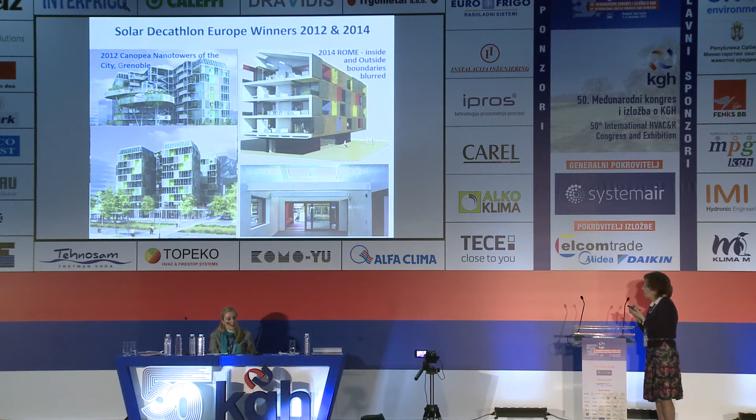So different possibilities in glazing, in opaque surfaces of the envelope, roof and so on. So building integrated PV exactly is replacing one layer within the structure of the building envelope. The Solar Decathlon happening in the US, Europe, and next year there will be the first in the Middle East, did show that it is possible to obtain results which are really remarkable.

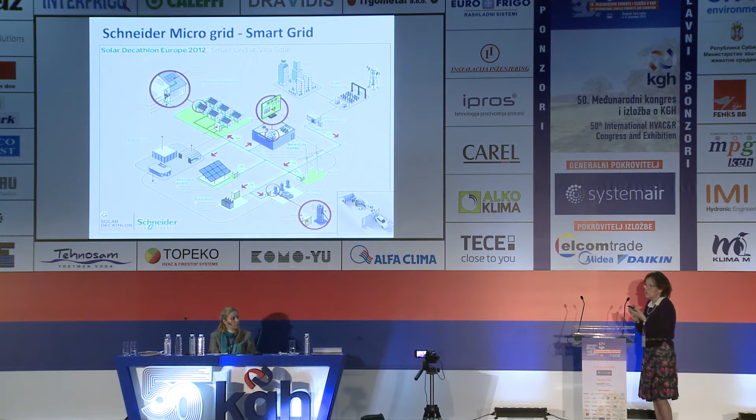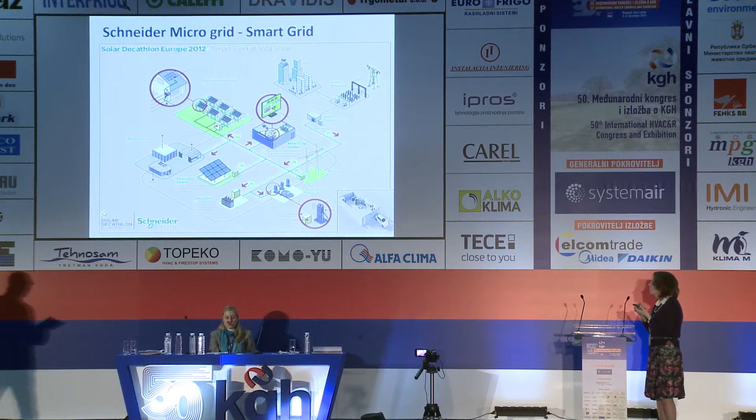Here we see the Schneider microgrid. So all houses very normal, not with very special PV. I mean, not very innovative, but just on the level of current technology, was enough to get houses which were producing 2 to 4 times more electricity than they were using and sending it to the grid. This was in 2014 in Versailles Park, even during days which were not really too rich in sun. So implementation, different types of implementation of building photovoltaic.

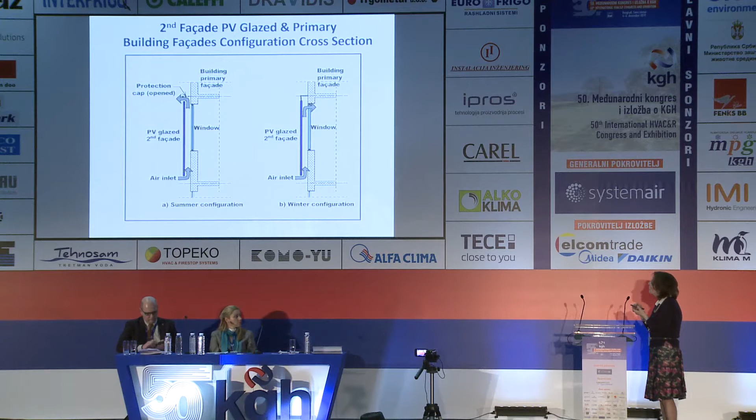So you will see here 2 types of implementation: summer configuration, when this air is used flowing behind the PV glazing, just to reduce cooling loads resulting from solar radiation. Winter configuration can be in the other direction; we can use this flow of air to preheat ventilation air.

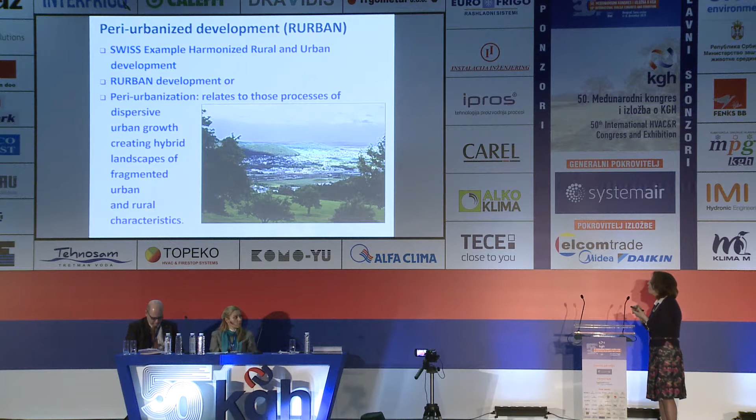The problem naturally with the implementation of building integrated PV: it is no problem in rural areas, when we have no shading from different houses in between, but in dense urban centers, it is not so easy. So, an example of socioeconomic status, and the way Rurban as a system was developed in Switzerland, is a model for all.

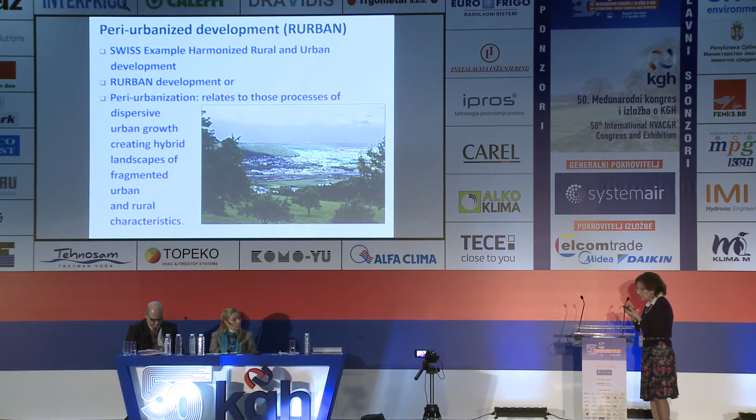So, small cities surrounded with agricultural land and people doing food production, and they are perfect locations for installing building integrated PV. And also there is a rule in Switzerland that only on the roof and only on buildings can photovoltaic or any other solar be used. So not on green surfaces. So big solar power plants are simply not permitted in Switzerland, and that's also very important to be aware of. Wind is different, so wind can be, although there are also some not well-known bio effects.

What is very important, and that is the main target of my presentation and speech, is how we can get cost-effective implementation of solar energy. At first, I say today electrical energy, because electricity is definitely needed for all aspects of life at the standard we need. It provides for people in cities, but also people in rural areas. It means for all Rurban people.

So it is necessary at first to implement in all kinds of design detailed analysis of loads, so dynamic analysis of building behavior, thermal energy, so building performance simulation. Designing any kind of system in buildings today just using summer or winter design temperature is simply not enough anymore. Absolutely, 8,760 hours are necessary to do the analysis, sometimes even for a shorter period of time.

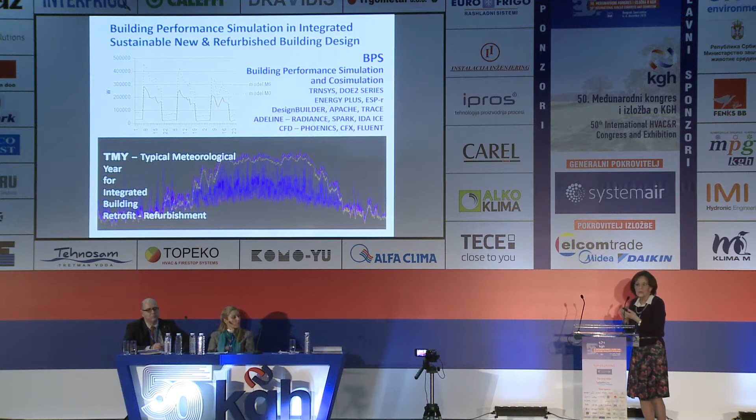There is a lot of software available, even free downloadable software, EnergyPlus for example, so it is no explanation that it is somehow expensive. Here is a list of examples from different kinds of projects I had. There is a social building in Belgrade. It is possible to see in this calculation that loads for heating and cooling could be reduced 5 times. And you see that nearly all apartments have split units, so they are using air conditioning. And air conditioning will be more and more needed because of global warming and the increase of temperature.

When we are approaching refurbishment, we have to try different models of building envelope refurbishment and analysis, as I said, building performance simulation, to minimize loads. It is always necessary to minimize loads and have the goal not 'nearly', which is not even an engineering term, but to try to reach a net zero energy building. As was shown in all the Solar Decathlons, it is absolutely possible, only if the house is not under the shadow.

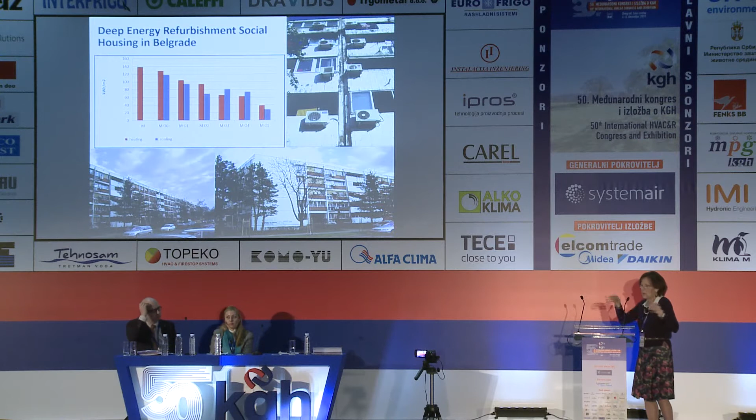Here is an example of a second facade, different ways photovoltaics can be implemented. And second, when we minimize loads, everywhere we have either air, ground or water, so environment, it is possible to use that environment as a source of energy and implement a heat pump, where we are increasing the exergy of the system. I showed in projects in different climates and with different electricity prices, expensive in Singapore, cheap in Russia, and so on, that everywhere the result is cost-effective implementation and even the possibility to power those systems by photovoltaics.

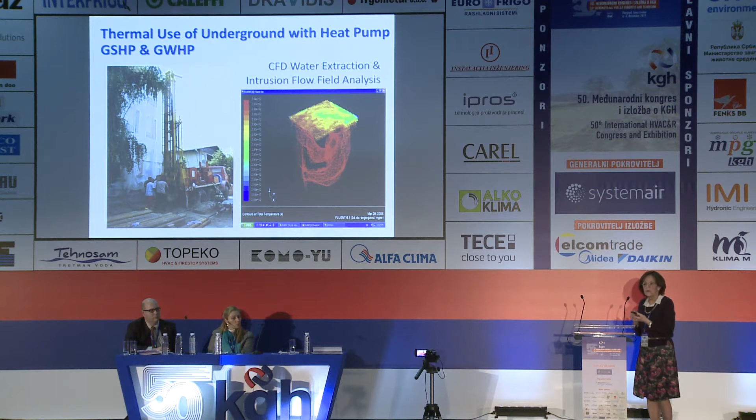Naturally, I showed these previous slides to show that everything is to be calculated, every project with the highest engineering and scientific knowledge of today. For example, using the underground as a heat pump source deserves a CFD analysis to locate the inlet and outlet in the right place. So no approximation, nothing rough. There are many projects based on typology of houses. You cannot do any renovation with typology and reach net zero. Every house needs its own analysis.

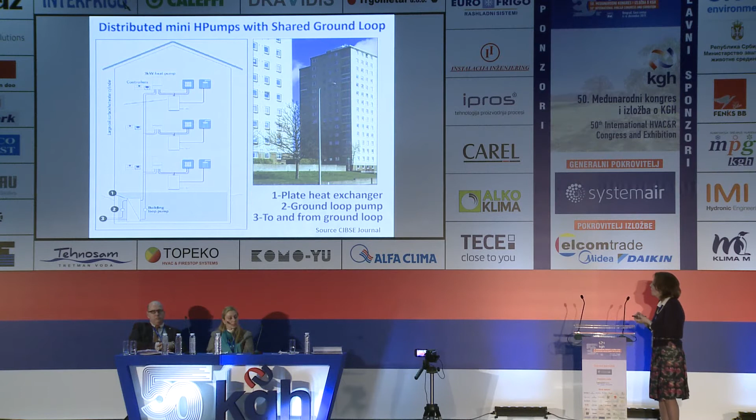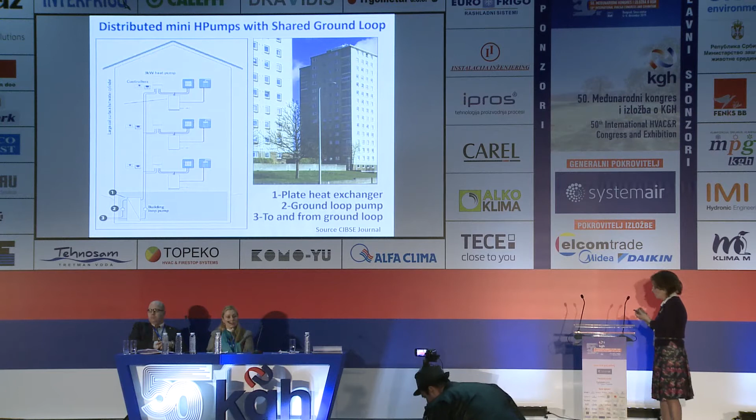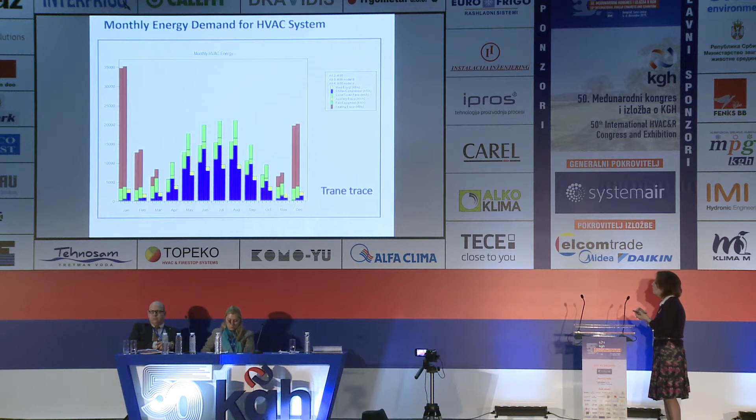The nicest example was recently published in a journal. For this kind of refurbishment, like in the previous social building with many split units, you implement a ground source heat pump, with a plate heat exchanger and ground loop pump providing all apartments. Downtown center was a very interesting project, with several models analyzed. Very useful for detailed analysis are the Trane TRACE model and Bentley, which can analyze in detail all components of the HVAC system and their operation at different temperatures. The final result for this building was that it was cheaper to do refurbishment and implement PV, including drilling for the heat pump, than to stay on Belgrade district heating, because of the minimal size of the district machine room.

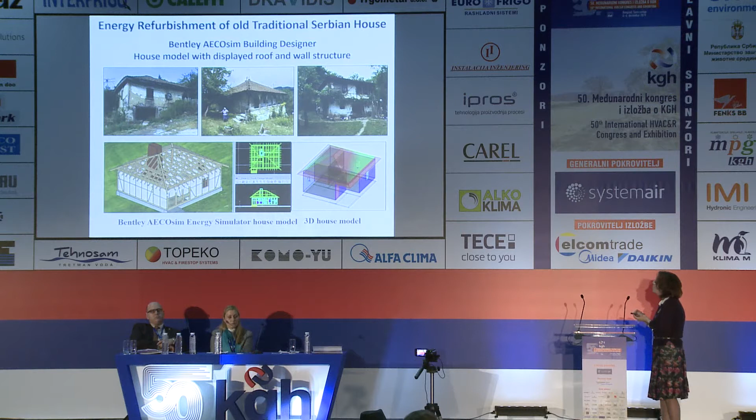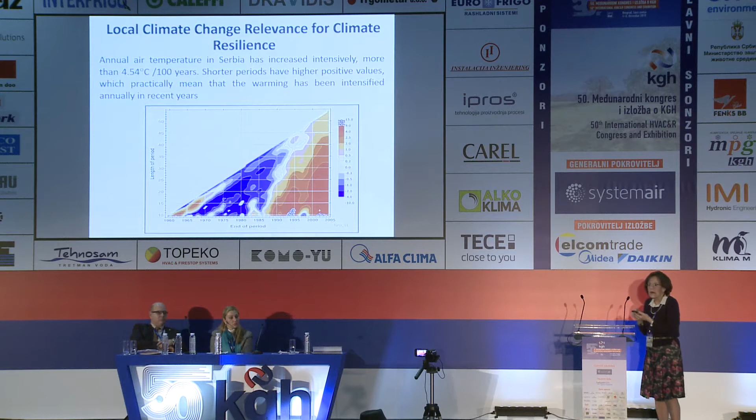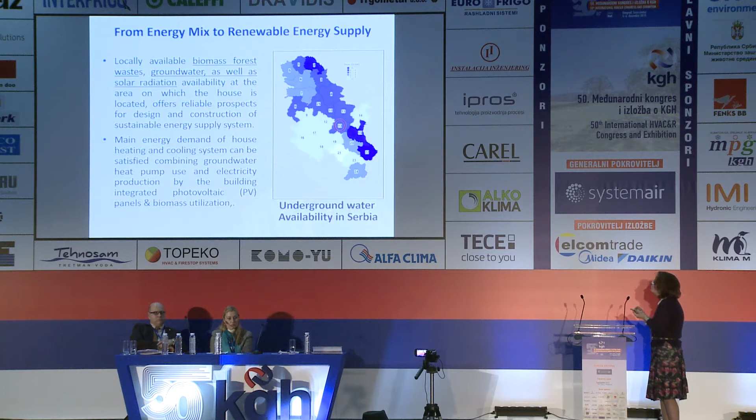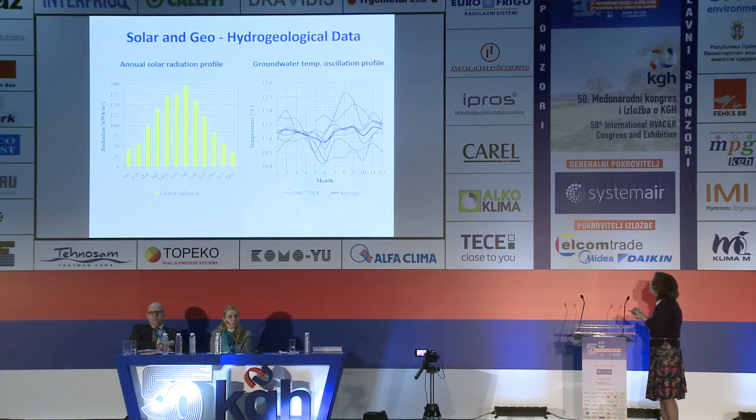The traditional Serbian house, as all traditional houses in the world, is bioclimatic. A Bentley analysis was done, and all necessary data were found, including weather data, and a very interesting graph. On the ordinate is the length of the period, and below the end of the period, and you see how the surfaces with higher temperatures grow as it gets later. Groundwater availability in Serbia, the final result after using all the data of the Hydrometeorological Institute, radiation, groundwater temperature, with different models.

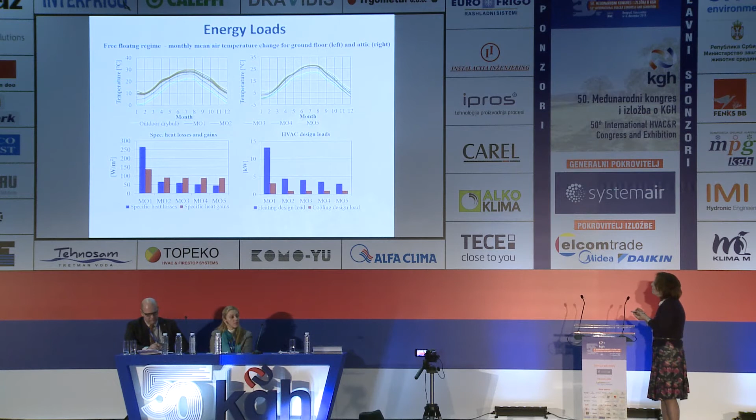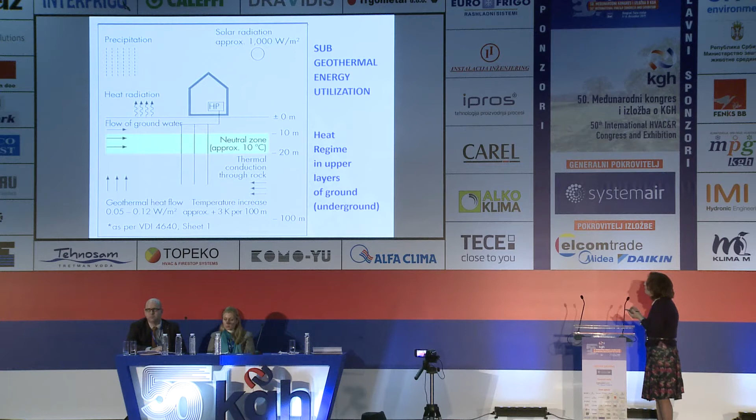Use of subgeothermal, that's a new term used by the mining faculty in Belgrade, and I think it should be changed in the terminology of ASHRAE and also the European association REHVA, because it is really not geothermal. Geothermal has impact here, but also from the outside solar radiation. So down to this 12, 15 meters, that is subgeothermal, and its use results in a very stable temperature in that layer.

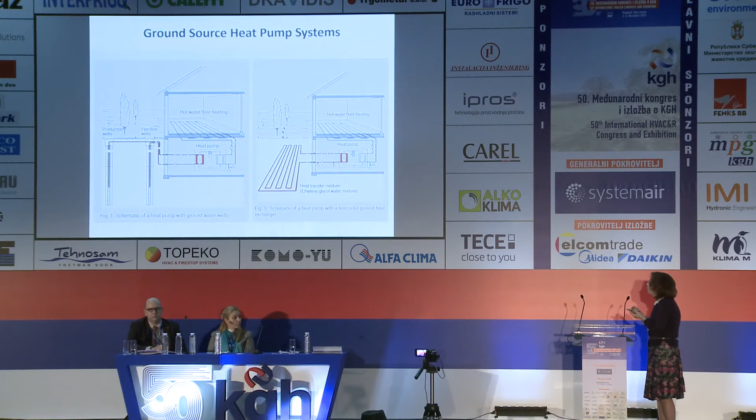And different kinds of implementation of sources: groundwater wells, ground heat exchangers, borehole heat exchangers, and even construction, and so on, are available in literature, particularly in German Verein Deutscher Ingenieure standards, large scale. So all these examples show that it is possible to design a cost-effective system.

The main problem which is addressed and should be more and more worked on, it was stressed in several presentations today, is the problem of intermittency. So intermittency of solar, of wind. And there are also possibilities to solve that problem using abandoned mines.

Abandoned mines of coal and some minerals can be used for storage, thermal energy storage, but also electrical and hydromechanical energy storage. There are a lot of abandoned mines in Serbia, in many regions, not only underground ones but also surface mining, which leaves surfaces that need geological cultivation but can be used for energy storage.

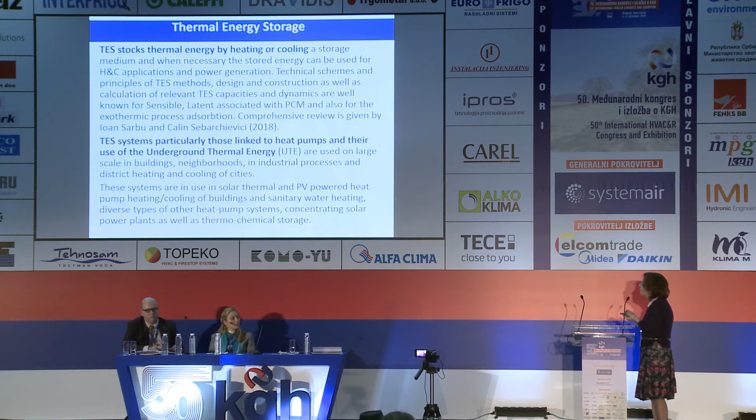Analysis at the solar energy laboratory in Golden, Colorado, did excellent thermal energy studies. In Romania, they also had excellent studies on thermal energy storage particularly, and concerning the laboratory in Golden, Colorado, high energy batteries, pumped hydro storage, compressed air energy storage, and thermal energy storage are technologies which can be implemented.

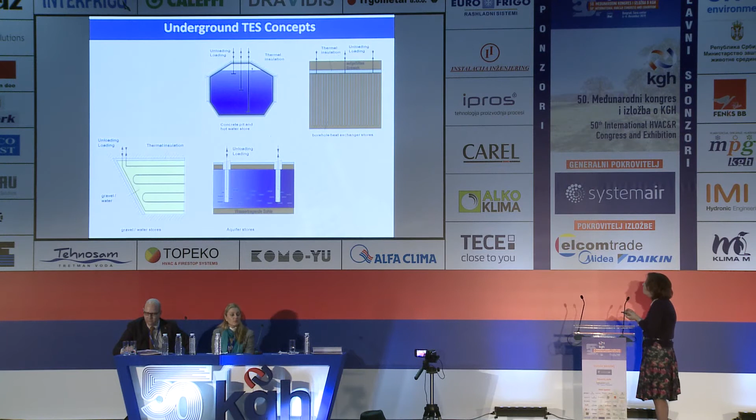To also have mechanical energy storage, it is like a reversible hydro power plant. Here are some underground thermal energy storage concepts, including aquifer, boreholes, caverns, and so on.

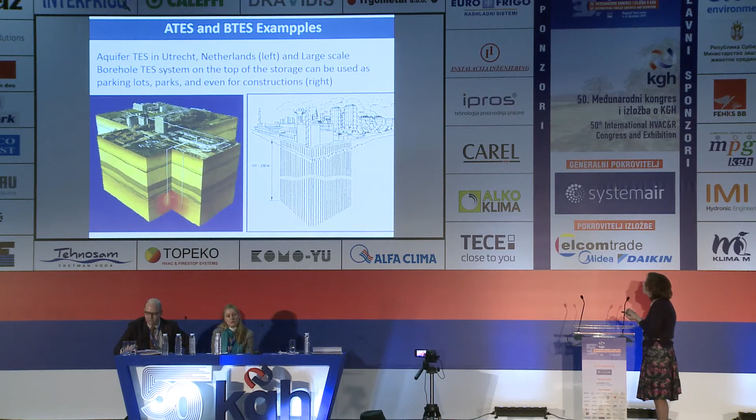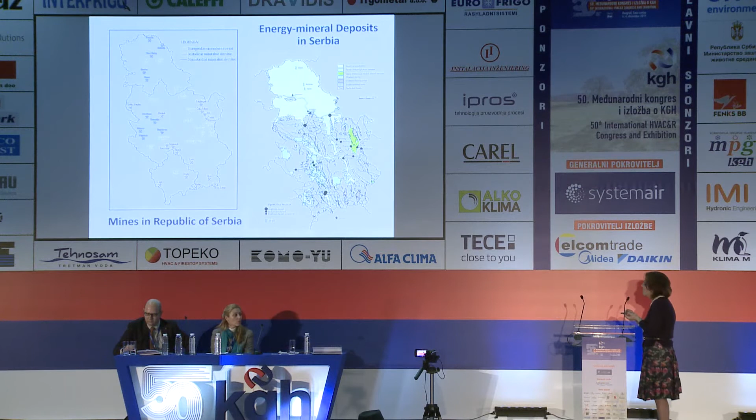And there are more and more examples of these mines, energy deposits in Serbia, and many of them are close to their exhaustion, and there are some abandoned. So somehow they are in some countries also used for a touristic purpose, but this abandoned mine can again be useful for heating our homes.

So that's about storage. Solar energy technologies, current status - absolutely, I stressed even at the beginning of the presentation that there is huge advance and reduction in prices. And there is also, I will conclude with this example, that these technologies, concerning solar PV.

Especially if used in extraterrestrial space and using extraterrestrial solar radiation, could provide quantitatively, qualitatively, by the exergetically higher value, more reliable, sustainable energy to serve. Nikola Tesla, more than 100 years ago, stated something here that is really very touching.

That his innovation and what he has done, his results will provide people with transfer of power over long distances, as we know, based on his invention, to be replaced by wireless transmission, whose principal method he had also developed more than 100 years ago. And there are also ideas from other people about how this power could be used from space, even in 1891 in some lectures in the US.

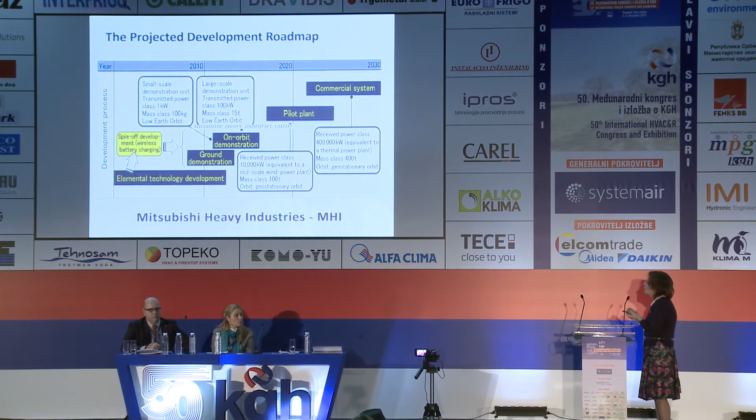But with what is happening these days in this world, when you read newspapers, especially the front pages, it looks much more difficult to realize what Tesla was speaking about - implementation of results in space, extraterrestrial space, solar energy utilization - as it was in Tesla's time 100 years ago, because there were some nations and people asking even to put weapons, even extraterrestrial, in space. So that's very, very important.

Besides science and engineering, we have to think about a new society in the world. To stop global climate change, in addition to uninterrupted R&D aimed at advancing solar and other renewable technologies, it is necessary to find relevant circular economy-based schemes of multi-sector complex system linkages for sustainable Earth resource utilization, environmental protection, and recovery of already damaged environments. Uninterruptible availability and variable quality requires energy storage. Large-scale renewable energy storage utilization needs large-scale storage systems and large storage volumes.